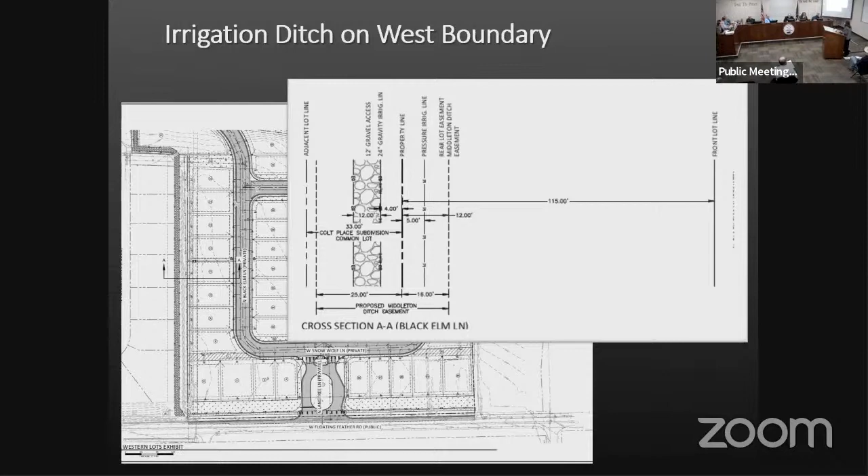And then focused on the buffering to the north, wanted to start with the transition zone and the definition. This is in the staff report that was provided as well when Sean outlined all of the applicable code sections.

I think this definition is really important for this project because it talks about that transition being determined on a case-by-case basis, considering all of the circumstances around. In particular, it's not required if you've got separation created by a roadway or a canal, where you end up with structures equal to or exceeding 100 feet from the new structures.

Here, we don't have a formal roadway or canal, but we certainly have a natural gulch. We also have a considerable distance. In particular, we have over 500 feet between structures to the nearest structure to our north, well over the 100 feet considered when you're looking at where transition is appropriate in your case-by-case analysis.

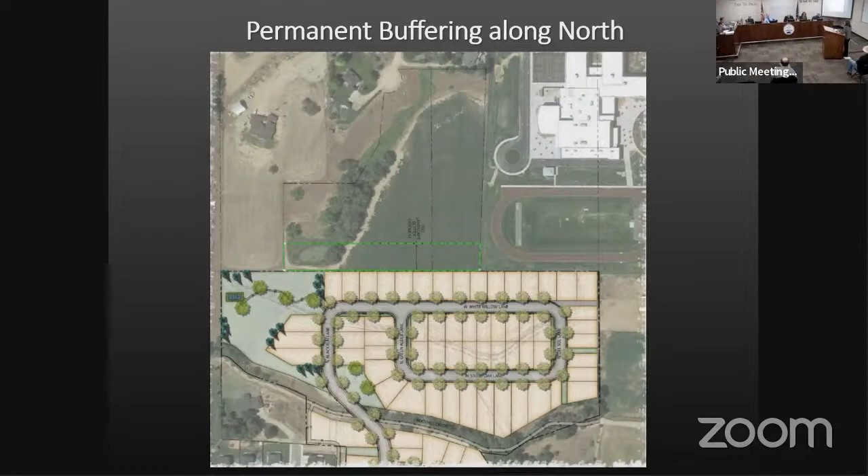I also noticed on this side, looks like the west side towards the south, you've got an existing neighborhood with 6 houses and you're putting 8 behind it. I would insist that it be at least a match and no more. Anytime you buffer somebody that's already existing, I don't like to see more houses next to it than what's already there. So if you have 6, I don't want to see more than 6. I count 8.

Councilmember Hershey, I appreciate the comment. They are zoned comparably and have comparable density, but you're right, it's not exactly 1-to-1 there. Yeah, I'm just telling you, I will not approve that for sure.

That's all my questions for now. There'll be more. Okay, thank you.

Real quick, Ms. Deb, are you requesting setback waivers? Mayor, thank you for that question because I failed to mention it. No, we are not. They were originally partly to accommodate the 55-and-up with a different structure, and they are not doing that now. So no setback waivers. So what would the widths be on these lots then?

I can't remember the range exactly. Some of them are in the 50s, down to 50-foot wide, and they go up from there. So Sean, these are like, our code's 5-foot side setback. Yeah, okay.

Okay, any further questions of the applicant at this time, Councilwoman? Yep, thank you. So I noticed a parking lot for the clubhouse. It is perpendicular to the street, and we've had some other projects come in where ACHD required us to reconfigure the parking lot so they don't back out into the street. I know these are all private, but is it possible to reconfigure so they don't back directly out into the street from that parking lot?

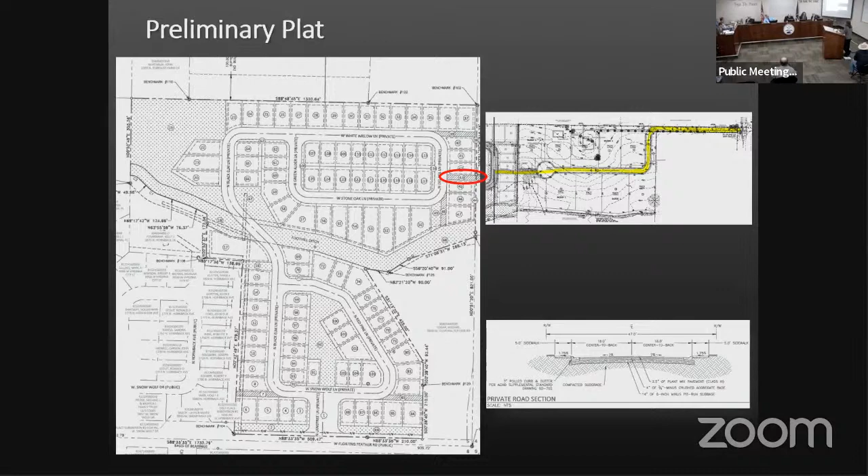Okay, and then my other question was about the pickleball court. Just curious on the location, it seems like it's a little bit out of the way. In my opinion, it seems like it might be more usable if it was in another green space. Was there a reason it was placed there? I was just thinking about functionality and people using it. But that was also back when it was 55 and older, so now that has changed.

Yeah, I think, and the developer can add more if they have other points, but I think the idea is to spread out the amenities so there's a variety of locations throughout the development.

Yeah, okay, any further questions, Councilwoman? Nope, and then all my other questions were answered in your presentation. Okay, thank you. Councilman Wheelock?

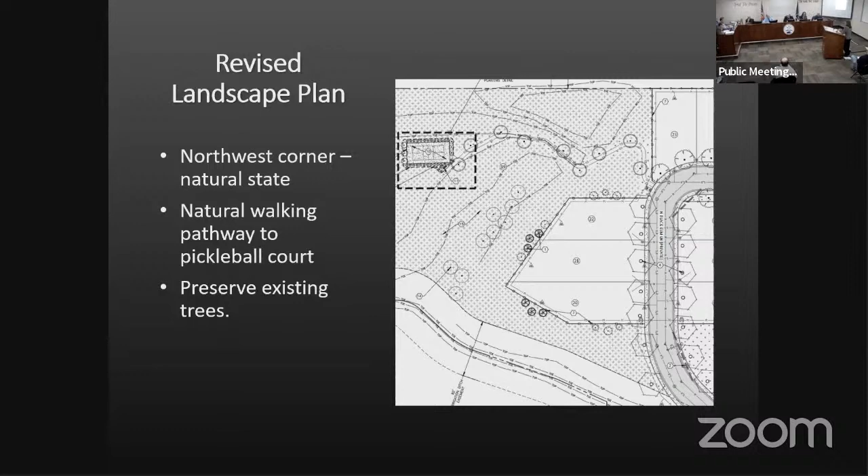Some of the things I have questions on: with the pickleball being put closer to the residents of Star subdivision to the north, having a skate park by my residence, the activities that go on there adjust my lifestyle from the amount of people just outside recreating, I guess. And that impacts the residents to the north that are not in this subdivision. I would encourage it be moved closer to your side of the subdivision, would be my recommendation. And I understand it's 500 feet, I have 500 feet between me and the neighbors and it's still not enough for me, but I get that.

And with that, the same buffer zone that's outside this property, if it were on your property, they would enjoy a little more buffer from this subdivision. Those are my thoughts, thank you.

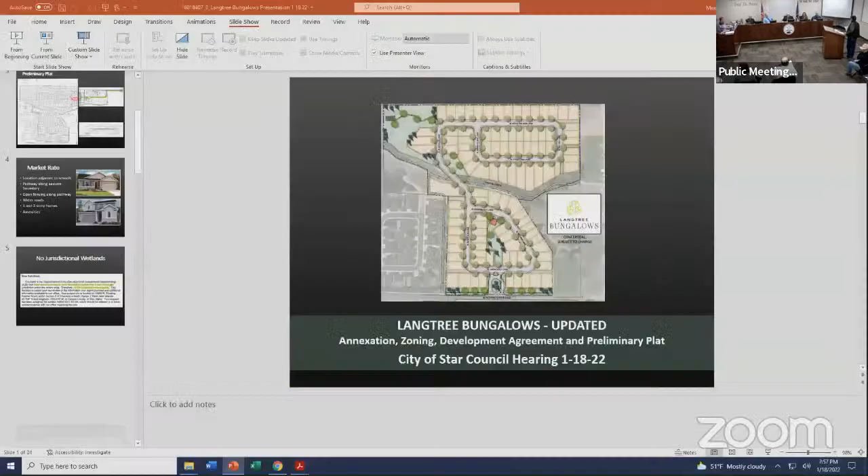Thank you. My name is Robert Faylau. I live at 2203 North Sunny Lane. I'm a resident of the transition overlay zone just to the northwest of this area.

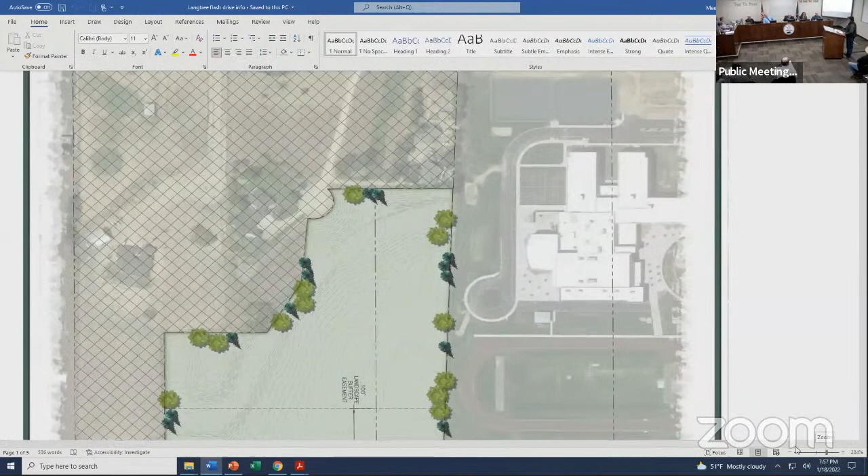This is a drawing that is in the packet for the Langtree subdivision. I believe that it's very misleading. I think everybody's kind of covered this, but it shows the crosshatched area. If you scroll up a bit, it says that the crosshatched area is the transition overlay area.

The area of the lots that are in the green with the trees around it is within the transition overlay area as well. Those are the lots also purchased from the Shriner subdivision. So that is misinformation there. That is also the transition overlay area. The transition boundary starts at that boundary, and in relationship to the lots, that boundary, that lot distinction is where the transition needs to happen.

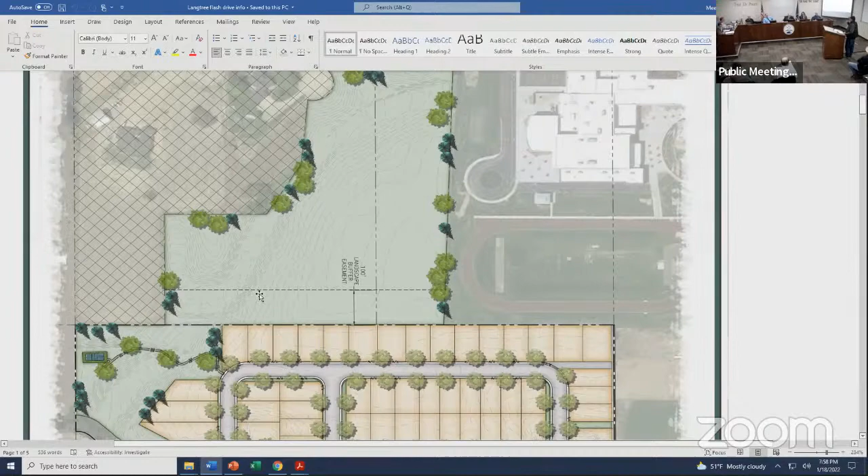If you go to the next one. I thank Mr. Haas for making very good points about the language of the UDC, and I think there's a couple points here. It says specifically, the very top says that the UDC is determining the codes for the new developments. It says right in the very first line, the size of a new residential lot.

Everything in this UDC is referring to the new proposed subdivision, not the existing lot that is north of this boundary. Therefore, any buffer has to be put within that new transition, or in that new development, just as Mr. Haas said.

And we totally agree. We've been speaking together with a lot of the people within the area of the transition, the special transition area just to the north. And we've come up with a proposal or a petition that is, if you go down below, that's signed.

This is why, as you're going by there, that boundary is not just sensitive to the lots in the Shriner subdivision that Walsh is purchasing and preparing for this. All the lots within that Shriner subdivision are affected visually by the houses that will be right up against that transition overlay zone, which they shouldn't.

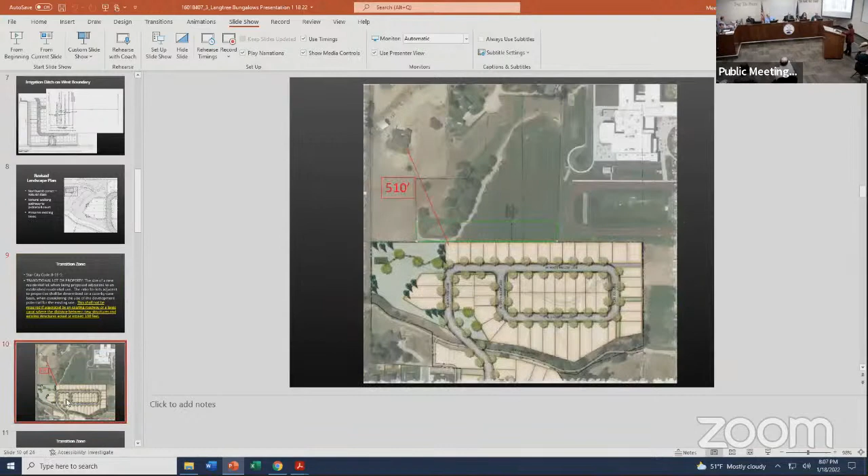Another thing I don't see on the map, but just below my property there's a ditch that was constructed to carry away water from my irrigation pond. I don't see that on there, and that's been all broken down. So instead of being bulldozed, I don't know if it's going to be piped or whatever, but they need to account for that. That's basically all I have.

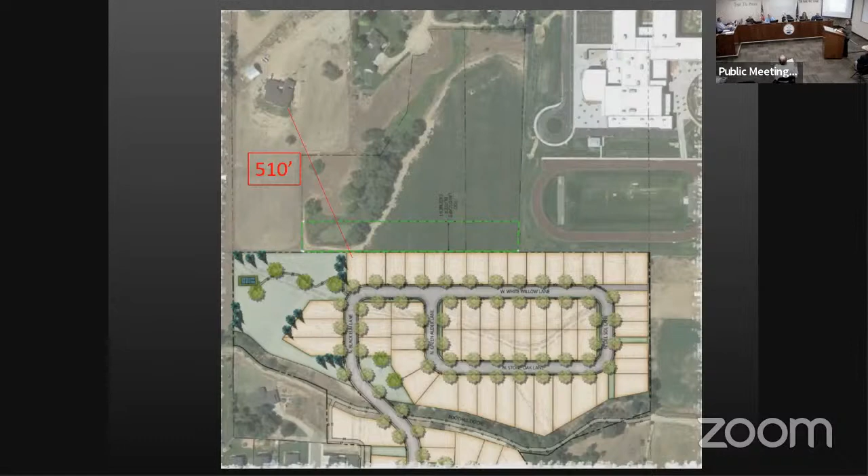Okay, and is it still a gated community? It is. So you only have a sidewalk coming in on one side in the front? I don't believe so, I think it's attached on both sides. Is that correct? Your drawing says one, so I'm looking to our engineer to confirm. Okay, he's looking. Currently, we have sidewalk - I think they need you in the microphone. Joe Pockner, 5725 North Discovery Way, I'm with KM Engineering representing the Walsh Group.

Just double checking on this - on the main entryway, we are only showing a pedestrian access on the one side. I think a lot of that was in with a gated community, a lot of times you have a gate for pedestrian as well, and so you try to keep that onto one side. I think we would ask that you have it on both sides and figure that out. We can do that, honestly.

And the little island that's past the gated part, I would like to see that removed - it's a hazard for kids crossing the road. I think we need to clarify before we remove that with Star Fire, because Star Fire indicated that can count as your dual access in and out of the property with the islands. I don't know if it means both islands or just one - that's what I want to clarify. Yeah, I'd love to see that not in there as a hazard halfway across the entrance.

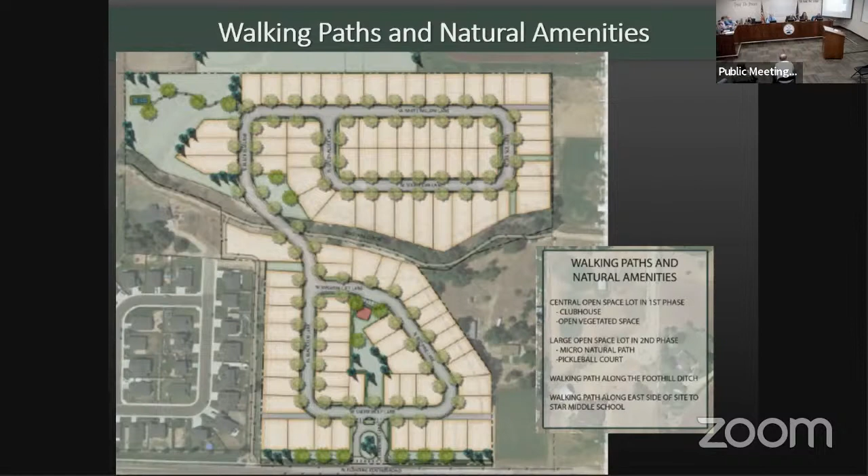Okay, Councilman Nielsen? Thank you. So I just want to make sure that we have all of the conditions here. Mr. Mayor, could you go back? Could you go back to the slide that listed those check marks? At the very beginning? Yep, I just want to go through these and make sure that these are still applicable.

So, emergency 36 foot. My motion is going to include, in addition to the 36 foot, the sidewalks on both sides. The easement's good, paved pathway to the school, free market housing, no floodplain. And moving so we're moving the pickleball court, extending that pathway at the top where it loops. So I move that we approve this application with the following conditions.

That the pickleball is moved out of the natural park and into a more central place in the development. That there is a trail through the natural park that loops around the houses there and connects from the north to the south. The sidewalk width to 7 foot wide along Floating Feather, as long as ACHD is in agreement with that, it gets built to that width.

That half-acre lots are put along the northern boundary, and as many as get the development down to 3.4 units to the acre. Also taking into consideration the lots on the western boundary that they will line up with existing neighborhood lots. Did I say that in an intelligible manner? Sean, anything?